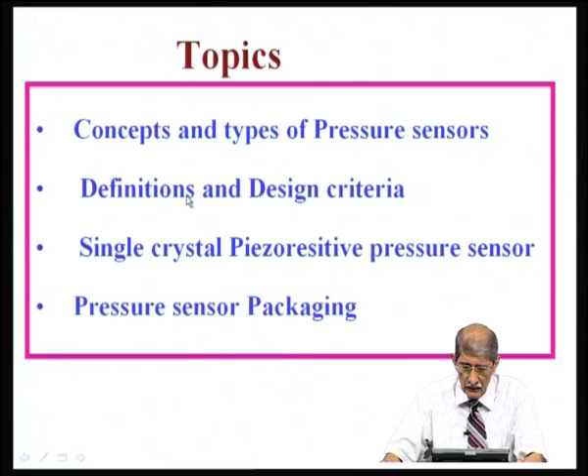So the pressure sensor involves or it requires a membrane, thickness decided by your pressure requirements, and the membrane is anchored all round to a thick frame, so that it is free to move up and down when it experiences a fluid pressure. That membrane is usually, in micro machined devices, silicon, and you have a sensor element. We will discuss what these two are.

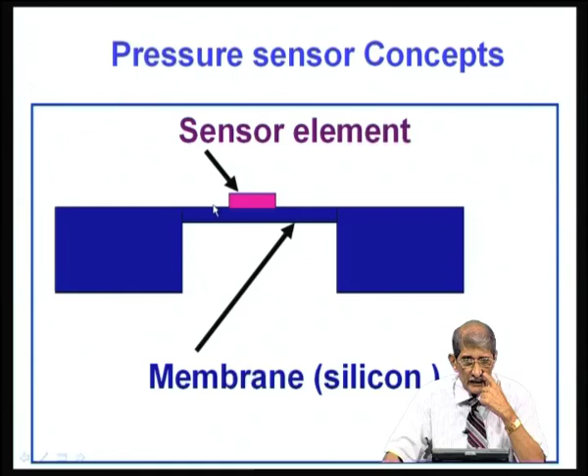So the membrane, or you can call it a spring also if you like, is usually or invariably made of single crystal silicon material. That is because silicon is a very good mechanical material. It has high Young's modulus, high yield strength, all those advantages are there, even comparable to or better than steel.

Excellent mechanical material. The added advantage is, unlike some of the metals, metallic membranes, silicon is free of creep, fatigue, hysteresis, virtually free. What is the implication of creep? If you heat most materials like metals to almost slightly above half their melting point, there is a chance of warpage of that membrane. Whereas silicon's melting point is 1410 degrees centigrade, you can go right up to 1200 degrees centigrade, and there is practically no warpage. So that is what is meant by no creep.

That is what has made it possible to make integrated circuits by processing at very high temperatures using silicon. If you are using it as a membrane, you can keep it moving up and down a large number of times, operate it a million times, there is no fatigue and no hysteresis. If you apply pressure and release it, it will quickly come back to its original position. In metal membranes, it takes a while to come back, and during that time you will have some spurious signal coming out of the pressure sensor. These are some of the main advantages of using silicon as a membrane, and it can be processed very easily using conventional integrated circuit technology.

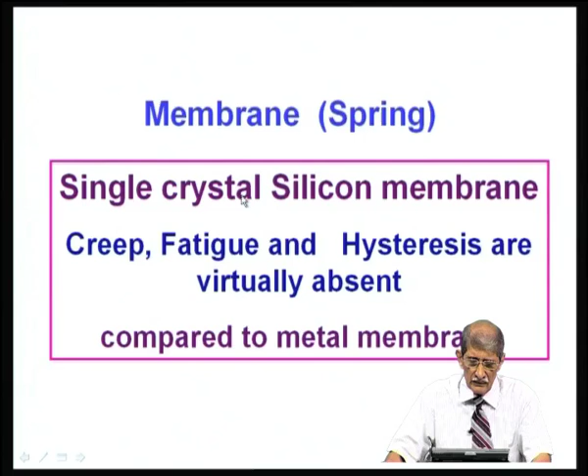Now the sensing element that you put on the membrane can be of different types. The most popular ones are piezoelectric, capacitive and piezoresistive. I will just go through what they are quickly.

The piezoelectric sensing: here a piezoelectric crystal like quartz or PZT, lead zirconate titanate, are very good piezoelectric materials. These crystals give electrical output when subjected to stress, so you can mount them on the membrane.

When this membrane is subjected to pressure, let us say from the bottom, the membrane will deflect up, since it is anchored here, and there will be strain in the membrane. That strain and stress will be transferred onto the PZT or piezoelectric crystal, and a voltage will develop across the two terminals of that crystal, top metal and bottom metal, giving you the output voltage.

You can see that you are not using any power supply for this; straight away you get the output. When the device is subjected to pressure, you get the output straight away, excellent for usage in remote places.

But the problem is this PZT has to be externally glued onto the membrane, the pellet is glued onto it, and this is not part of the conventional integrated circuit technology. That is a disadvantage, but you may say you can deposit some PZT polycrystalline materials and use it, though then the sensitivity will go down.

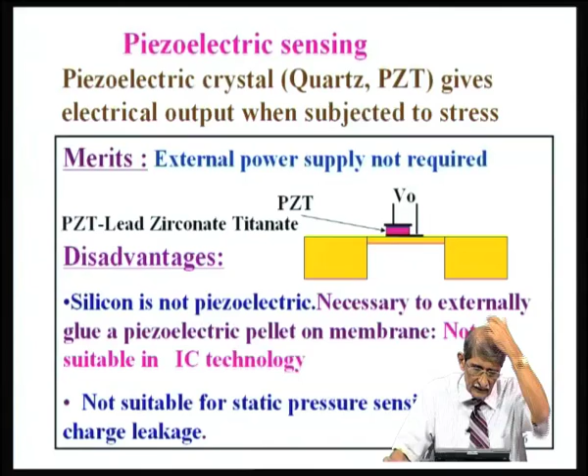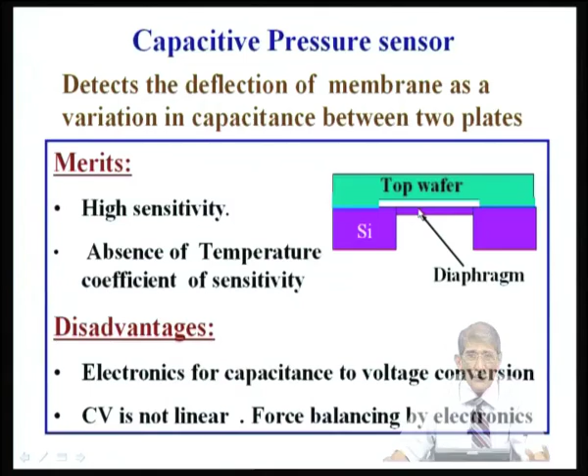Now let us take a look at the capacitive pressure sensor. You can see the membrane is here, and you put another top wafer, bond it onto this wafer with a gap. So that when this membrane experiences pressure from the bottom, it will deflect up, then the gap between the top wafer and the membrane is reduced, and the capacitance will go up. So this operates on the principle of changing capacitance due to change in distance between the two electrodes. How much the distance changes depends upon the pressure.

So it is very good for sensitivity, in this type of capacitive pressure sensors the sensitivity is excellent, and also this capacitance change is practically independent of temperature. So temperature coefficient of sensitivity is absent.

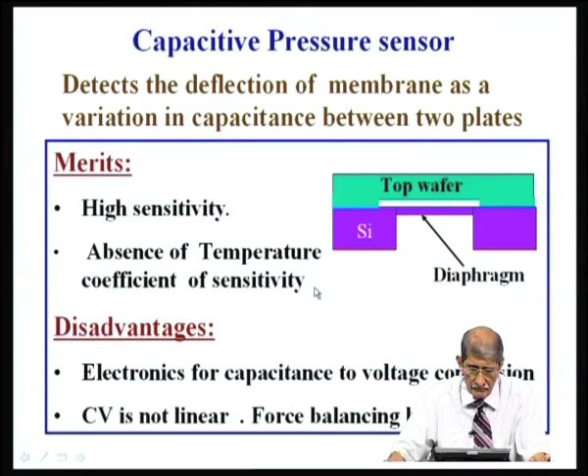On the disadvantage side, the main thing is the capacitance voltage characteristic is not linear. The capacitance change will not linearly vary with the displacement, so it is not a linear function of pressure. So you may have to do linearizing circuits to accommodate a large range of pressures, and you definitely need electronics in this system because you have to convert capacitance to voltage. These are the added requirements for capacitive sensing, otherwise it is very highly sensitive and temperature insensitive. That is the biggest merit.

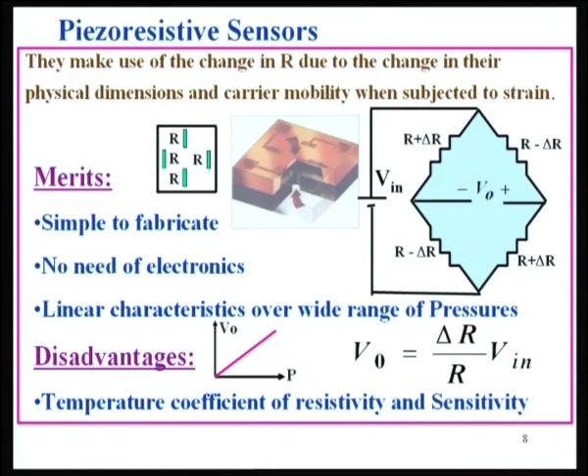I have shown the isometric view of the silicon micro machined pressure sensor. The membrane is realized by micro machining technique. You can see the angle between the bottom surface, which is the 100 wafer, and the 111 plane, which you have discussed in your technology lectures. So you have the membrane, and its thickness can be precisely controlled based on your design.

Then these red colored ones are the resistors R1, R2, R3, R4, arranged like that. Now, in this case, this is a different location that I have shown here. R2 and R4 are arranged

perpendicular to this dotted line, which is nothing but the location of the membrane edge. So those two resistors experience longitudinal tensile stress and the values will go up - R2 and R4. R1 and R3 will go down in this particular case. So these at the edges here will go up, and these at the center of the membrane will go down in resistance.

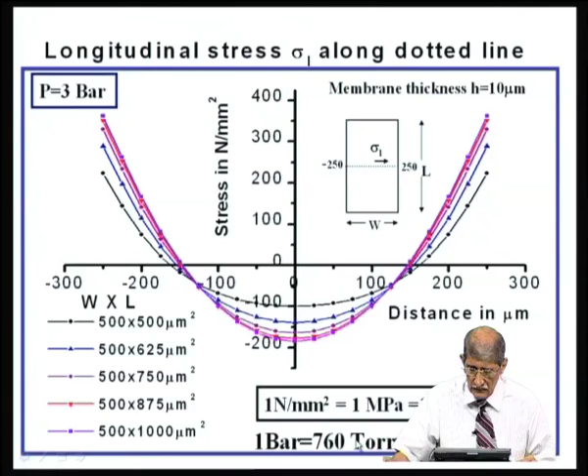This is 2000 atmospheres. When the membrane is subjected to a stress perpendicular to the plane, it is subject to a stress of 3 atmospheres, 3 bar - 1 atmosphere is 1 bar, so 3 bar is 3 atmospheres. In fact, if you are familiar with other dimensions for pressure, 1 bar is 760 torr, which is 760 millimeter of mercury, or 1 Newton per millimeter square is 1 megapascal.

1 megapascal is 10 bar. So if you have 3 bars of pressure on the membrane, applied uniformly all through the membrane, perpendicular, then the stress will vary from the edge to the center and back to the edge.

At both edges, minus 250 and plus 250, the stress is maximum, and what we are talking of is the stress in that direction. If you put a resistor there, you can call it longitudinal stress along this direction. So that stress for a 3 bar pressure is 2000 bar - you can see that the applied pressure of 3 bar is amplified in terms of stress at the edges.

So the membrane virtually acts as a pressure or stress amplifier, such that if you put a resistor at these edges, you see the amplified stress. So for a small pressure, there is a large amount of stress experienced by these resistors, which is actually transferred from the stress on the membrane.

As you go from the left hand side to the right hand side, the stress varies from 2000 bar, and somewhere about the middle between the center and the edge, the stress is 0 on the top surface of the membrane. As you go down further to the center, the stress is negative, meaning compressive. Going further right, it becomes less compressive, then 0, then tensile. So you have the stress variation: tensile, less tensile, compressive, less compressive, tensile, and maximum at the edge.

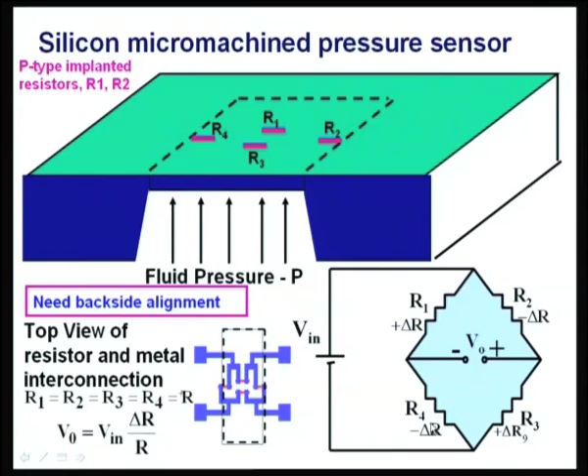I just have to point out here, R1 and R3 actually go up, and R2 and R4 go down. So if these two go up, the polarity will... if this goes down and this goes up, R3 goes up, the voltage will be positive here, and if R1 goes up, R4 goes down, the polarity will be negative here.

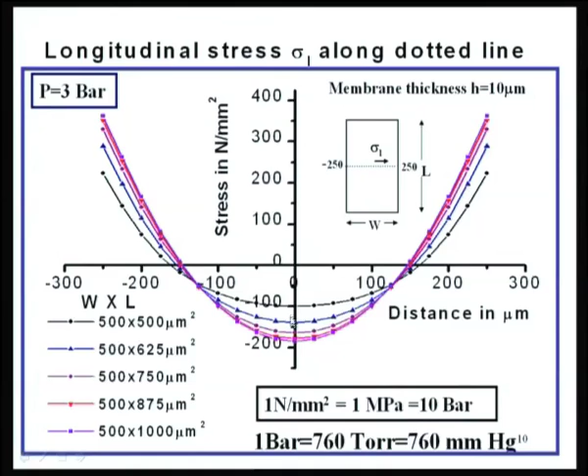One more thing I want to point out is that if you keep the width constant and vary the length of the membrane, the stress concentrations throughout will increase. For example, if I make it double, width 500 micron, length 1000 microns, the stress will become much larger. You can see it goes up from 200 Newtons per millimeter square to about 350. Same way here, the compressive stress also goes from 100 to about 200.

Now the definitions. The strain in the crystal structure deforms the energy bands, and that is why the resistivity changes - that is the physics of that. The gauge factor - you have certain parameters which you have to define, that is the gauge factor.

Gauge factor is delta R by R, change in resistance divided by original resistance, divided by strain, and strain is delta L by L. So the resistance R is actually rho L by A.

So delta R takes place due to change in rho, L, and A. Delta R can be written in terms of all these changes as rho by A into delta L, plus L by A into delta rho, plus rho into L into the differential of 1 by A, that is delta A by A squared, minus...

Now there is one term one has to remember: delta L by L is actually the strain epsilon. Delta A by A is the change in the transverse direction, and that you can put in terms of the diameter as twice delta d by d.

So you rewrite this whole thing as delta R by R, divided by R. When you divide it by R, what you get will be delta rho by rho, plus delta L by L, minus twice delta d by d.

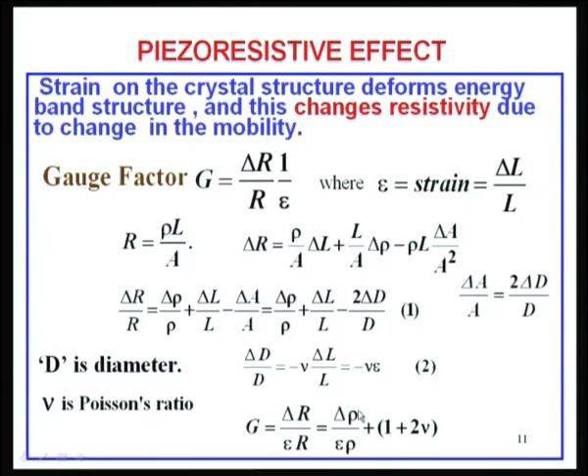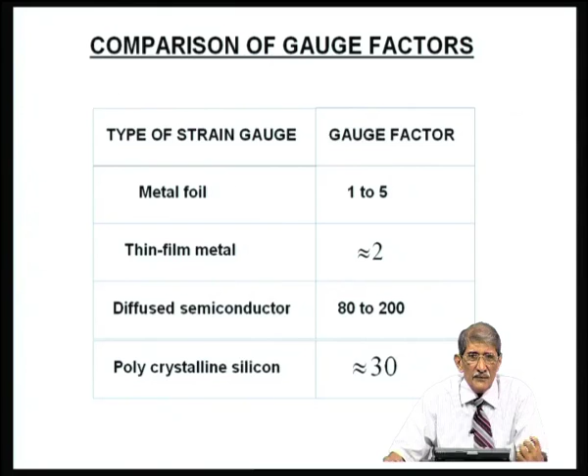Okay, so to take a look at some numbers, metal foil will have gauge factor of 1 to 5. This gives you an idea how much delta R by R for a given strain. So if you can measure delta R by R, you can get information on strain, and if you obtain the information on strain, you can obtain the information on stress, which can be correlated to the pressure.

Thin film metals, 2 is the gauge factor. Diffused semiconductors, that is single crystal, it is 80 to 200, very large. Polycrystalline, that is not single crystal, made up of a number of single crystal structures, that is about 30, that is the gauge factor.

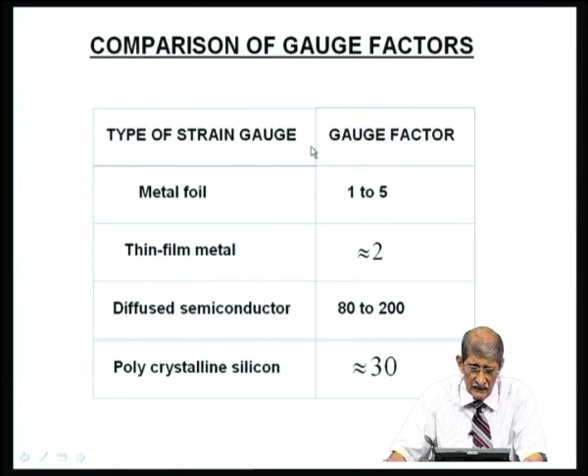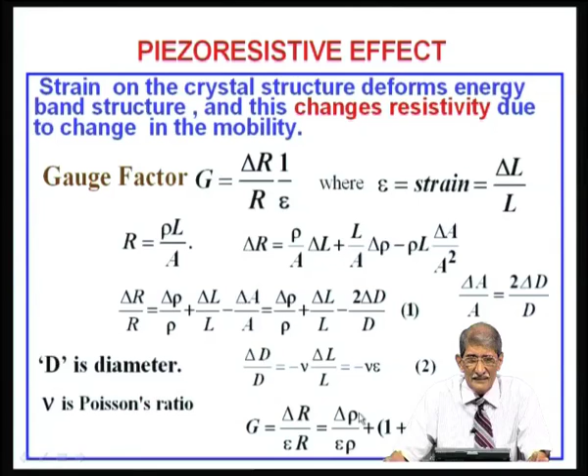Now we take a look further on the piezoresistive. This term that I have introduced to you here is the gauge factor, which tells you delta R by R related to strain. Delta R by R divided by strain is the gauge factor.

Now there is one more term similar to the gauge factor, which relates the change in resistance delta R by R to the stress, that is the piezoresistive coefficient. So delta R by R is related to stress sigma through this proportionality constant, coefficient pi. Pi is the piezoresistive coefficient.

Now, you recall we defined delta R by R as gauge factor G into strain, and in this we define delta R by R as piezoresistive coefficient into stress. So you can define delta R by R with respect to stress through the piezoresistive coefficient, or delta R by R related to strain through the gauge factor. Both are allowed. You can correlate one to the other, because sigma divided by strain, stress divided by strain, is called Young's modulus.

In applied mechanics, all of us know that this is Young's modulus. So gauge factor is related to the piezoresistive coefficient pi through the Young's modulus, sigma by epsilon, and that Young's modulus is usually defined by a symbol E. Do not confuse it with the electric field, but this is a general symbol that is used, E.

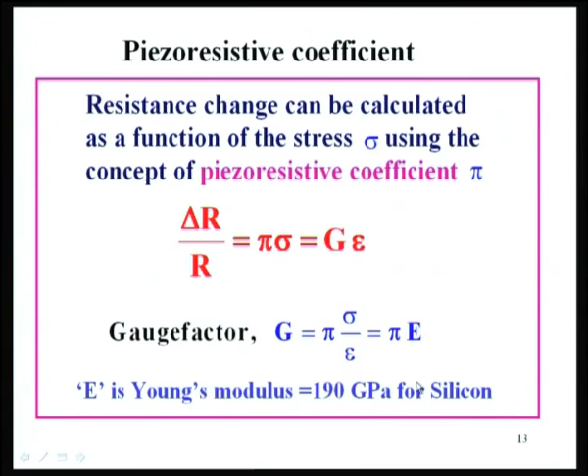So the gauge factor is related to the piezoresistive coefficient through the Young's modulus. But without confusion, delta R by R is piezoresistive coefficient into stress, or delta R by R is gauge factor into strain. The Young's modulus is about 190 gigapascal for silicon. Gigapascal is 10 to the power of 9 pascals, and 1 pascal is 1 Newton per meter square.

Now let us take a look further at the effect of longitudinal stress sigma L and sigma T on R. We will see where these stresses should be located. Supposing this membrane shown by color is subjected to stress perpendicular to it from the top with a pressure P, whatever you say in pascals, if you subject it to that stress, from the analytical analysis you can see a formula is available to correlate this applied pressure to the stress at the edge of this membrane in that direction, the x direction.

If I put a resistor there in that direction, perpendicular to this edge of the membrane, that will be the longitudinal stress we are talking about. Stress in the x direction is along the direction of the resistor where the current flows, that is longitudinal. So sigma x for a pressure P will depend upon the ratio of the membrane dimension.

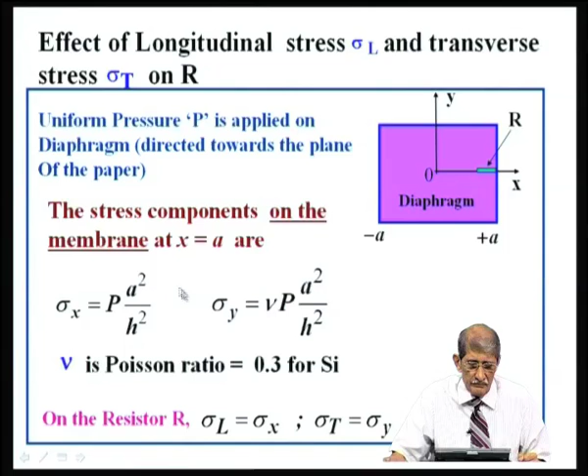On the resistance R mounted like this, sigma L (longitudinal) is P into A by H whole squared. If I have the resistor located like this, current will flow in that direction - you call that longitudinal, and perpendicular to that is the width of the resistor, called transverse. So longitudinal is P into A by H whole square, transverse is nu times that.

Now, let us put this in terms of the piezoresistive coefficient, because for the material you will know how much is the piezoresistive coefficient, or how much is the gauge factor.

So, sigma L is P into A by H whole square, and sigma T is nu times P into A by H whole square. The total change in resistance is due to the combined effect of these two. Notice delta R by R is the sum of the effects of longitudinal stress and transverse stress: pi L into sigma L, the longitudinal piezoresistive coefficient multiplied by longitudinal stress, plus the transverse value.

Now, delta R by R you can put as pi L into sigma L, which is P into A by H whole squared, plus transverse stress into nu into P into A by H whole squared.

Now, this pi L and pi T are opposite. For single crystal membrane, pi transverse is negative of pi longitudinal, because the longitudinal stress will increase the resistance for p-type, while transverse stress will decrease that. So that is why this negative sign takes care of that.

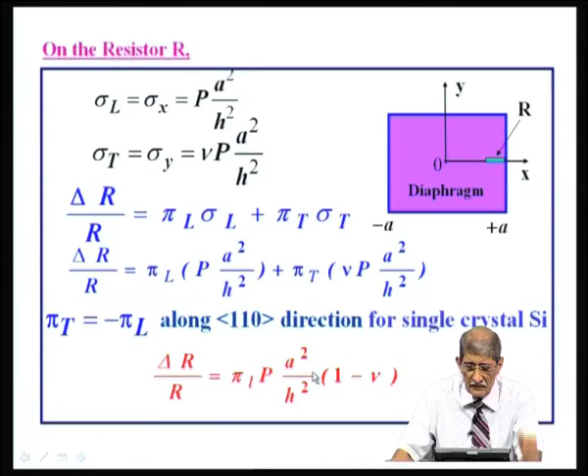So delta R by R is pi L into pressure into A by H whole squared. A is half of the width of the membrane size, by H whole squared into 1 minus nu. Nu is Poisson's ratio, about 0.3.

So you can express this in terms of the piezoresistive coefficient, or in terms of the gauge factor, because pi L and G L are related through the Young's modulus. If I divide this by the Young's modulus, the stress divided by Young's modulus gives strain. So G L into strain gives delta R by R. Either way, you can express it.

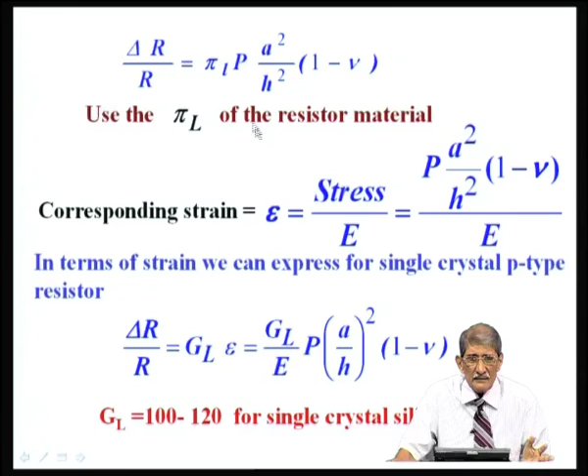The key thing is you must know the stress or the strain. Stress divided by Young's modulus is strain, then you multiply it by G L or pi L, the gauge factor or the piezoresistive coefficient. With that, we have discussed the definitions. Now let us get back to the single crystal piezoresistive pressure sensor, how it works.

So we have already seen this - this is the membrane created with the cross section, prepared by etching silicon from these portions through anisotropic etching, which is already well known to you. On this membrane, I have shown two here, because if you see the top view, the membrane will be here, and if I take the cross section here, I can see only these two resistors.

So the four resistors are located like this: R1, R2, R3, R4, because at the edges and in the middle at the edges the stress is maximum - longitudinal here, longitudinal here, transverse here, transverse here. That is the key thing: two of them should increase, the other two should decrease. That is why you chose these locations.

So, in this case, if all the r values are the same, then you can put V naught equal to delta r by r into V in. We've said this number of times — delta r by r, you can measure V naught in terms of V in. Both V naught and V in will be known, delta r by r is known. From delta r by r, you can determine what this quantity is.

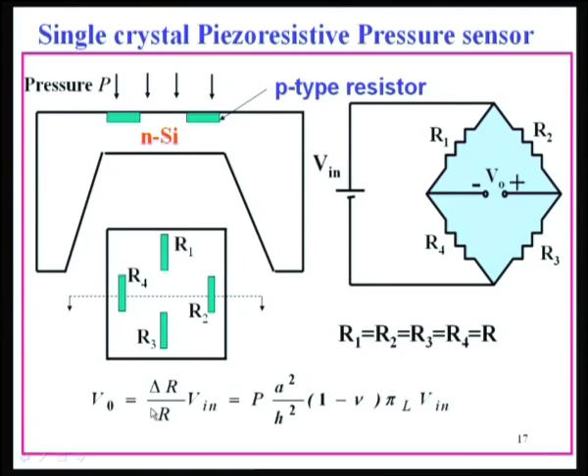So here, this entire thing is the stress into the piezoresistive coefficient. Let us take a look at the sensitivity and the burst pressure. What is sensitivity? Sensitivity is V naught divided by the pressure.

V naught is delta r by r into V in, which is pressure into stress, this quantity, into input. Now in this term you see the pressure P. So sensitivity is delta V naught divided by delta P. Delta V naught depends upon delta P, and for a given voltage you divide by that. This quantity is pi L into A squared by H square into 1 minus nu — that will give it straight away. So sensitivity will depend upon the material chosen, the longitudinal piezoresistive coefficient, and the A by H ratio.

A is half of this side, H is the thickness. If you want to increase the sensitivity, for a given dimension, go on making the thickness less and less, which will make it more and more sensitive — more output for a given input voltage, for a given change in pressure.

But there is an upper limit on this sensitivity that comes from the burst pressure. For example, if I keep increasing the pressure on this membrane, the maximum stress is experienced at the edge, which is applied pressure into A by H whole squared. So if I go to a maximum pressure, at a particular maximum pressure the stress at the edge will reach a maximum value, which will be the critical stress — that is the point at which the membrane will yield, it will burst.

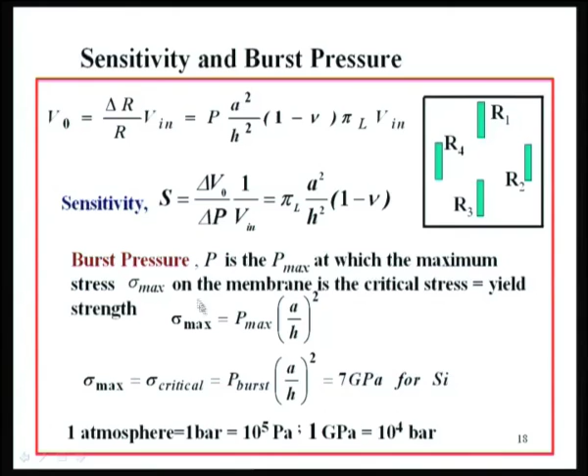If H is smaller, this factor becomes larger and larger, and for a given pressure, the sigma maximum will be reached at a lower pressure. So the maximum pressure you can use will be less if the sensitivity is more. The guideline is: thinner the membrane, the better your sensitivity, but the maximum pressure you can use will be lower, because it will burst at a lower pressure.

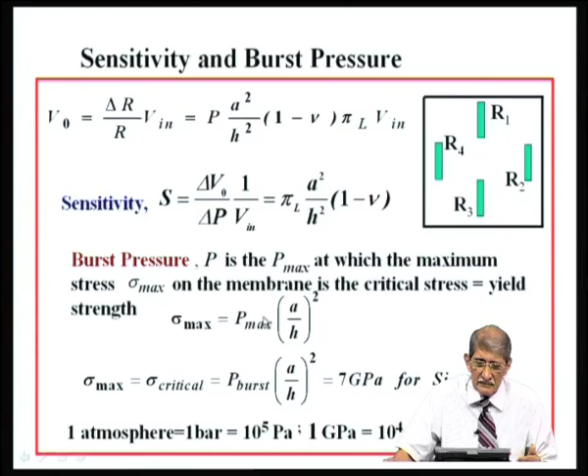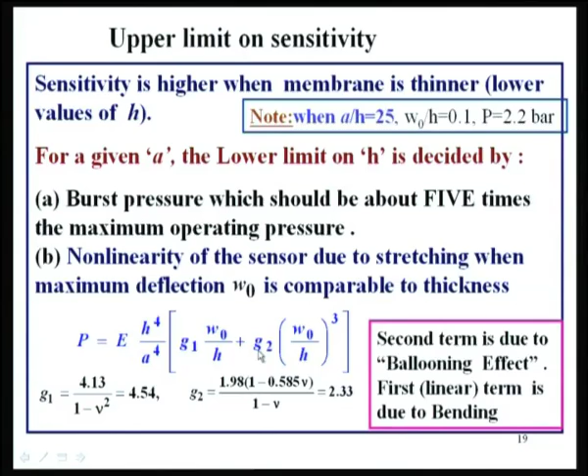Now, there are different types of pressure sensors. Once you understand this concept, we will take a look at the different types of pressure sensors.

Absolute pressure sensor, you measure the pressure relative to vacuum. That means you have a cavity which is completely sealed and there is vacuum inside the cavity, and the membrane gets deflected due to the external pressure, that is absolute. You are measuring the pressure with respect to vacuum.

The second type of pressure sensor is the gauge pressure. In the gas cylinders you put a gauge, and that gauge is measuring the pressure with respect to atmospheric pressure. For example, if the cavity is filled with 1 atmosphere pressure air, then whatever you see outside is over and above that pressure, how much is the pressure, that is the gauge pressure. So it is called gauge pressure sensor.

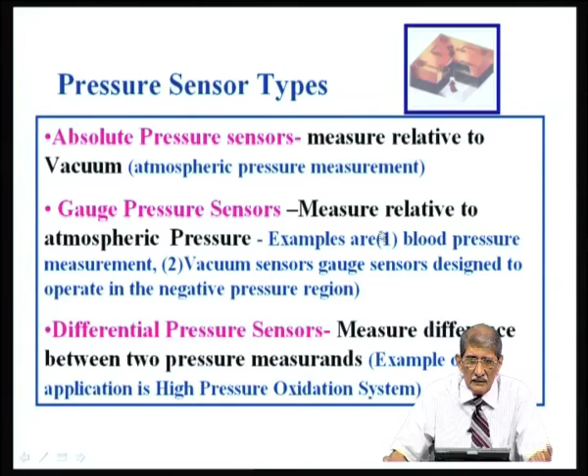If you are measuring blood pressure, they measure it relative to atmospheric pressure. So when you say blood pressure is 80 by 120 during systolic and diastolic, that means it is 80 millimeter of mercury and 120 millimeter of mercury with respect to the atmospheric pressure.

Vacuum gauge, you measure vacuum, that is also a gauge pressure with respect to atmospheric pressure, how much it is. So you call it as minus 10 to the power of minus 1, minus 2, that is the fraction of the atmospheric pressure.

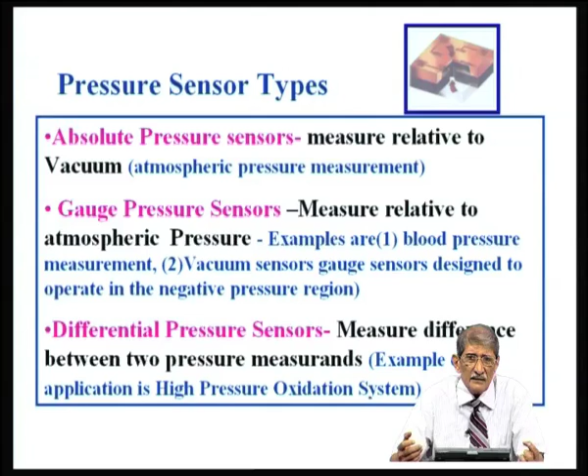Then you have got differential pressure sensors, which measure the pressure on top and bottom on both sides of the membrane. These are used when you want to monitor the pressure from both sides and keep a pressure constant across a membrane, and if you want to vary the two pressures, inside pressure 1 bar, outside pressure 1.5 bar, and inside pressure becomes 1.5 bar, outside pressure also you keep increasing by 0.5 bar. So difference is maintained 0.5, that is the differential pressure.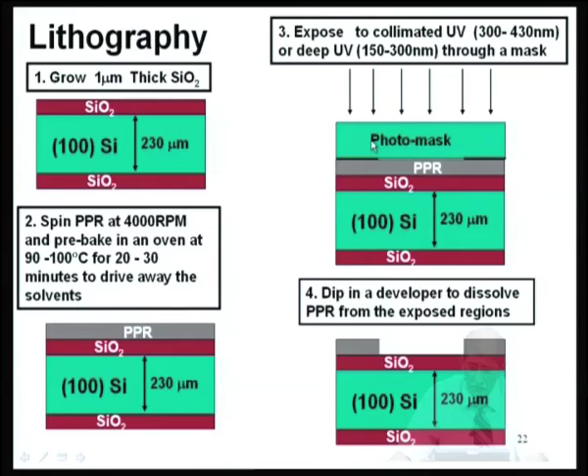Now, to go through quickly, I do not have to do this in detail for you because you have done the lithography. So I have shown the cross section. Take 100 silicon, let us say 230 micron thickness, grow oxide, spin photoresist, expose that photoresist through this mask, photo mask, there is a pattern here. So light can go through this pattern, it will get exposed here, positive photoresist, you can develop it, the photoresist is removed from here.

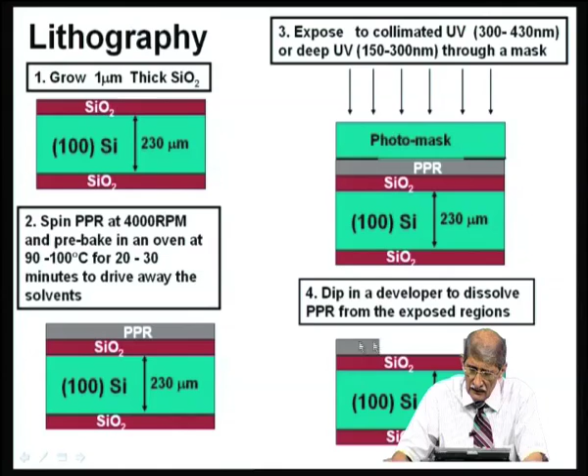So you got the photoresist here, I show it once again here. I am quickly going through this lithography step because you already know it. So you have the photoresist here, remove the photoresist from here, post baking etcetera you do at 120 to harden the photoresist. Then, using the photoresist as the mask, these are cross sections, etch the silicon dioxide using dilute hydrofluoric acid.

So you got the photoresist, below that oxide, this oxide is removed. You protect the backside oxide because you do not remove the photoresist. Then, after this, once you etch this oxide, strip off the photoresist from both sides. So, starting from the oxide all over, you have ended up with the oxide removed from here.

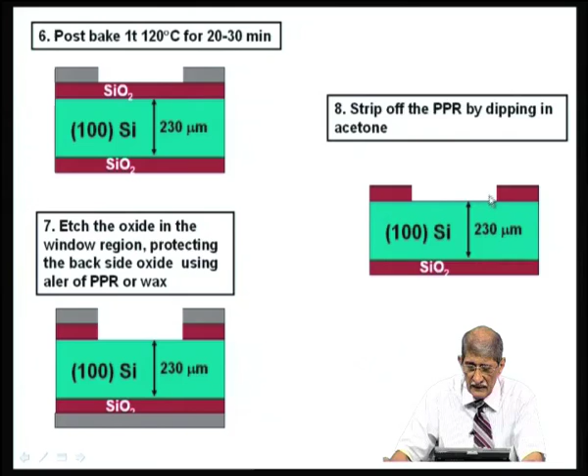Now, this one you put it in the potassium hydroxide etchant. So in this portion you can etch silicon, and from your knowledge of this KOH etching you will see that it will go in this direction controlled by the 111 plane.

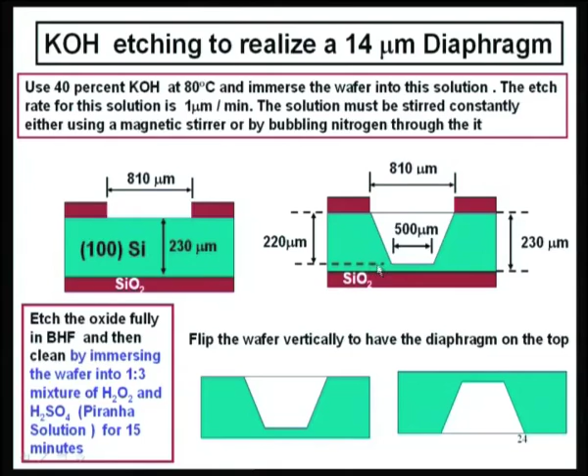If you etch up to 220 microns, and the size left out here is 500 microns, when you etch 220 microns, you can calculate that the size of the opening here is 500 plus 220 divided by 0.7, that is 810 microns.

So in the design, you must design an 810 micron pattern size. When you have that pattern opened and etch it to a depth of 220 microns, you will end up with a membrane of thickness, say 10 micron thickness, and 500 micron dimensions.

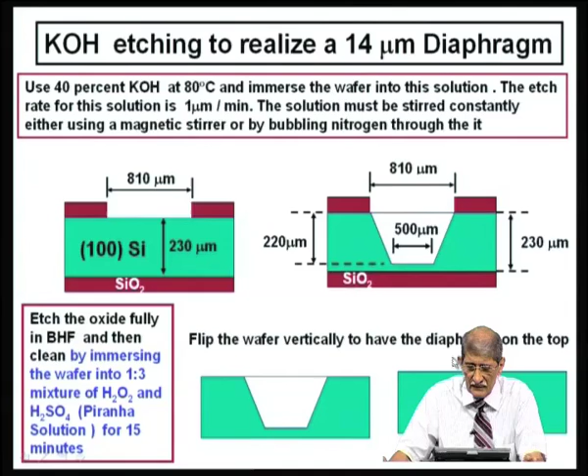I strip off this oxide, you get this, and I flip it upside down, you get the membrane. This is the cross section. Looking at the top of this, I am showing one device, but a number of devices will be on the wafer. If I show one part of the wafer, it will look like this, nothing will be seen, the cross section is like that.

You want to put the resistors on top of this membrane, for that you will do lithography, and you must see it from the top. When you see, you must identify where the membrane location is.

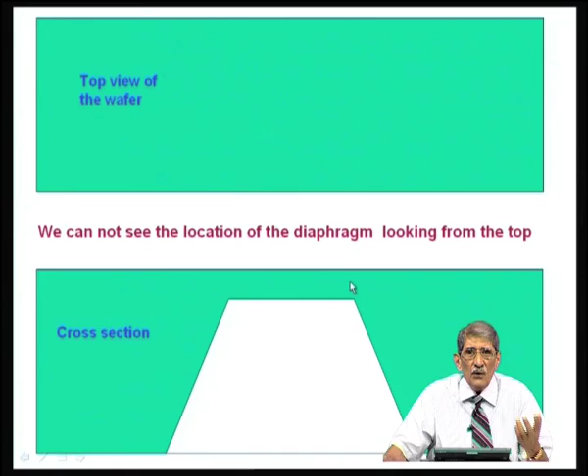One way of doing that is to shine infrared light, IR light, from the back side of the wafer. Then you can see this particular thing transparent like that, because IR can go through from the bottom, and if you put a video camera on top, you can see this membrane.

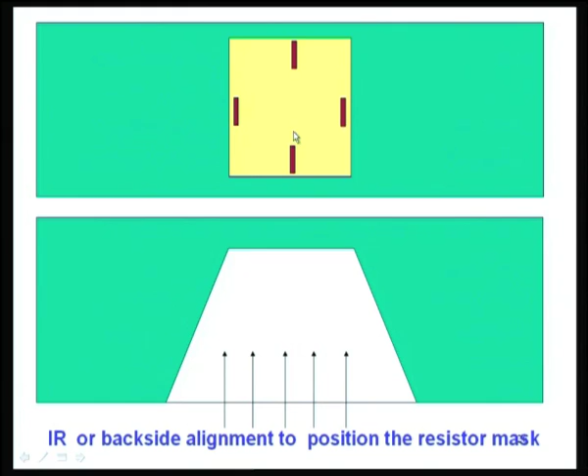I have shown this, and then by lithography technique from the top, you can grow oxide, open a window in the oxide in these portions, and diffuse resistors here. That is the technology part of it. You can put the resistor in these portions, and then make connections between the two.

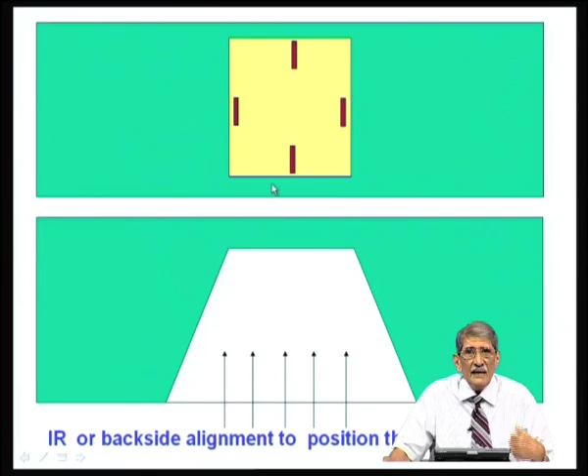So this is IR lithography, or you can have a machine with facility for backside aligning, storing the pattern on the backside and the ability to see it on the top. So you can put the resistor like this or like this, either way.

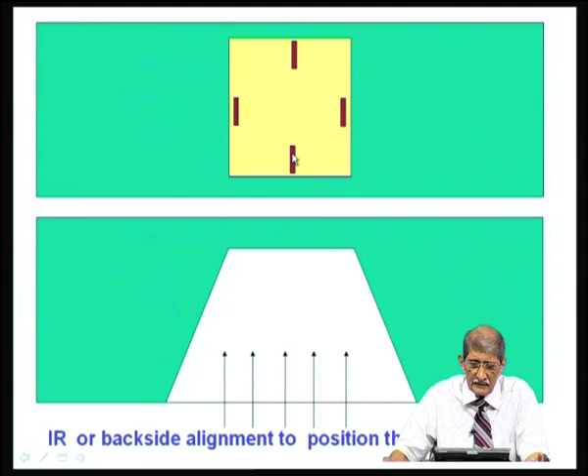Here this will experience longitudinal stress, tensile stress, these two transverse. Here these two will experience longitudinal tensile stress, these two will experience longitudinal compressive stress. These two will go up in value, these two will go down. Here these two will go up, these two will go down in value.

Okay, so a couple of things I want to point out here. This particular thing I just skipped.

You can actually either do IR exposure or store this pattern focusing from the back side, store it on the video camera, then look from the top, have a pattern on this side, align them together, then you can bring this resistor to that side. That is another way of doing that.

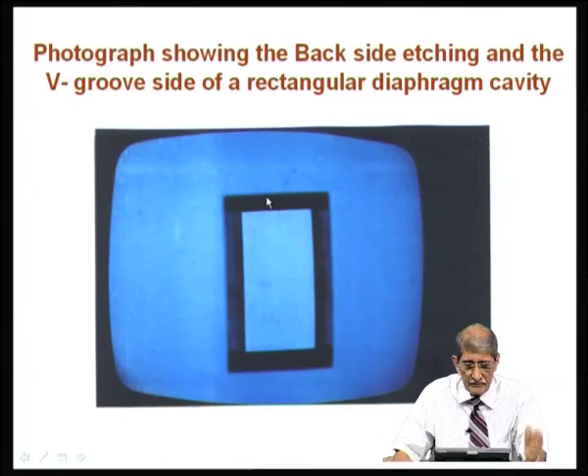Anyway, what I am trying to point out is the resistors should be aligned correctly. If you do not have the ability to align these resistors with respect to this portion, they will move away from the membrane and will not experience the stress. Now, part of this is how to package this.

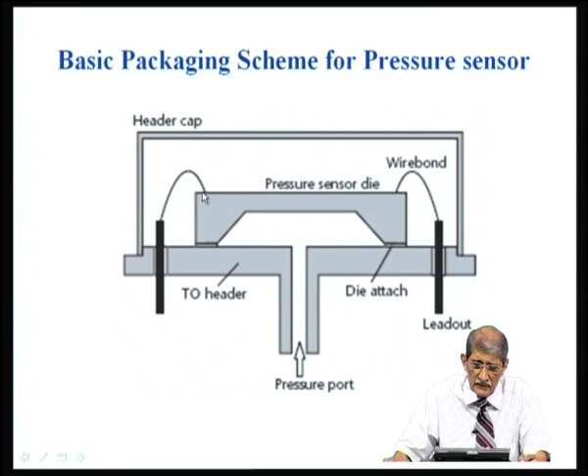Now, to see more of this, I will just take you through some other region. The top of this particular, I am not showing the die here. You can see the die is put on this. The die will look like this.

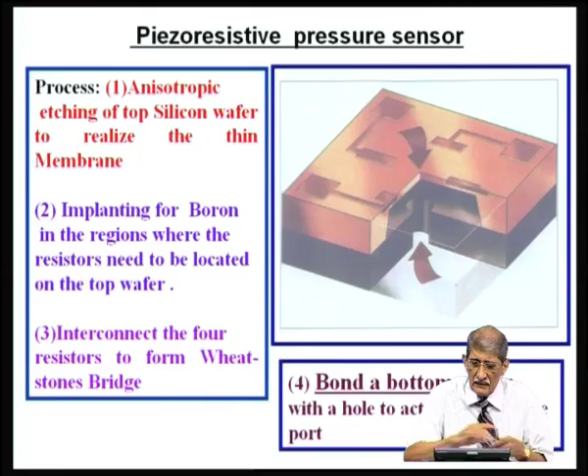So this is what is shown here. Bond pad is there, resistors are located on the membrane, from the bond you can connect to this one. So with that I think I will close my discussion today. We will continue on this, on a particular case study of a pressure sensor with more details, making use of polysilicon piezoresistive pressure sensors. Thank you.